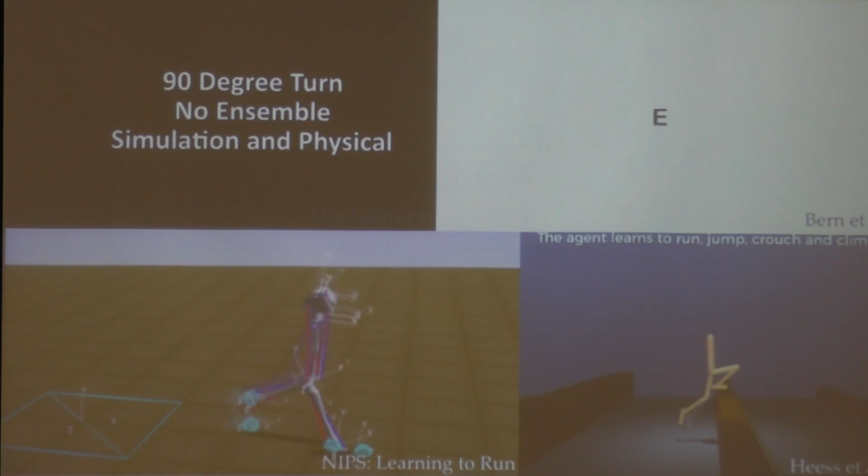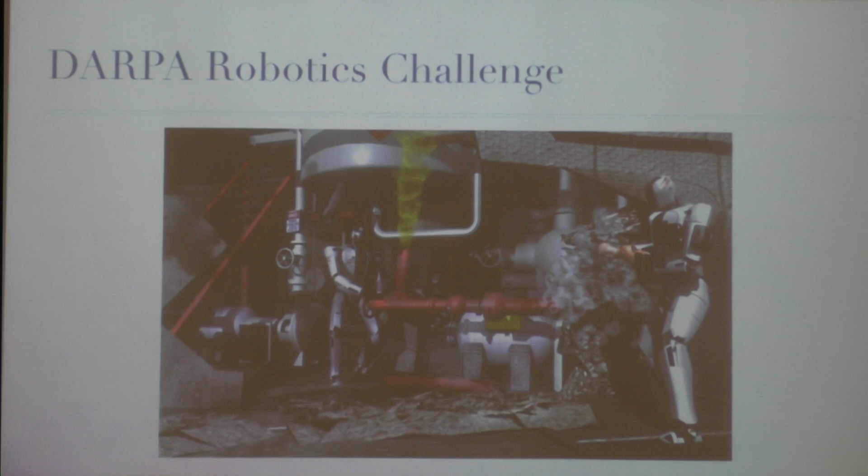So we start to see a lot of these emergent research areas at the intersection of computer animation, robotics, and artificial intelligence. And this change, I think, can be traced back to two distinctive events in robotics in the last 5 years. The first one I want to highlight is the DARPA Robotics Challenge. I think many of you probably participated in that. So the goal of the DRC is to really promote this promise of humanoids, right? We want humanoids to move like humans, such that they can adapt in the man-made world.

And the second event, which I think has a great impact, is the NSF National Robotics Initiative. So the whole concept of a co-robot, right? Putting robots together with humans in this collaborative setting. And that really requires research to rethink robotics from the perspective of humans. So these two top-down efforts from the national funding agencies actually have some unintentional impact in computer animation, because they basically highlight two, I would say, of the most important problems that we're trying to solve in computer animation: how to move like humans and how to interact with humans. So today I'm going to mostly talk about the second question, how to interact with humans, but I will also mention just one project about how to move like humans.

So how to move like humans. This is one of the most important research problems that computer animation researchers have been investigating for decades. Physically based character animation has evolved to a point where we can simulate complex human motions with great visual realism. So if you're just talking about simulation, we're actually quite confident that we can get a virtual agent to move like a human to some extent. But apparently this is not good enough. If we can only do things in simulation, however we make the virtual agent move like humans, it's not going to make any impact in robotics.

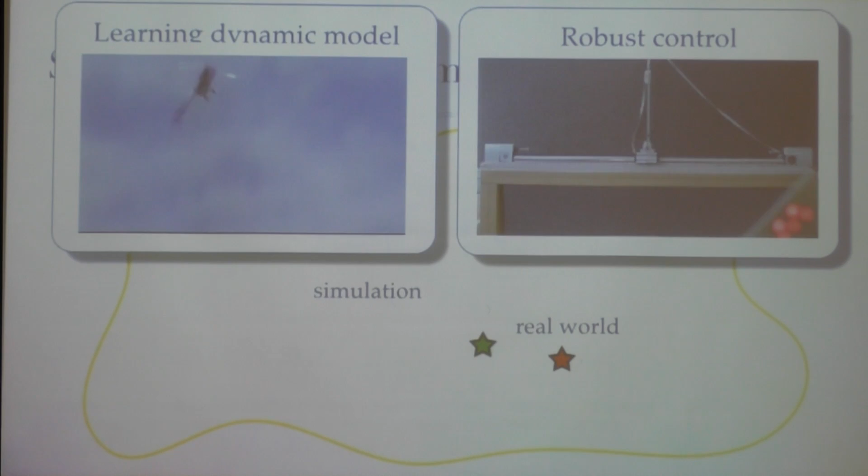Alternatively, we can try to train a dynamic model using the real world data by iterating between control policy training, data collection, and also dynamic model fitting. The drawback of this approach, however, is that sometimes it requires a large amount of real-world trials, which could be expensive, time-consuming, and dangerous to acquire.

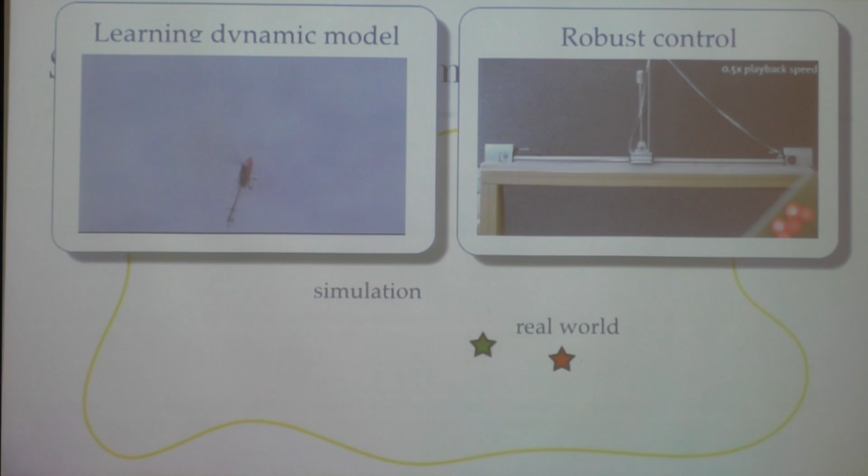So our approach to model the discrepancy between model parameters is slightly different. Assume that we can learn a control policy for every single point in this space, meaning that for every single dynamic model, we learn a control policy for that offline. Suppose further that during online execution, we have a very fast method that can tell us which dynamic model best fits the current sequence of observation.

Okay? So with these two hypothetical models working together, during online execution, all we need to do is to look at the recent history of our state and action pairs, and then select one dynamic model that best explains what we observed, and then execute the control policy corresponding to that dynamic model.

Of course, this is hypothetical. In reality, there's no way we can pre-learn a control policy for every single dynamic model in the world, but it might be possible to pre-learn a continuous parameterized space that covers a subset of states that we care about for this particular task. So with that idea, we designed an algorithm based on reinforcement learning.

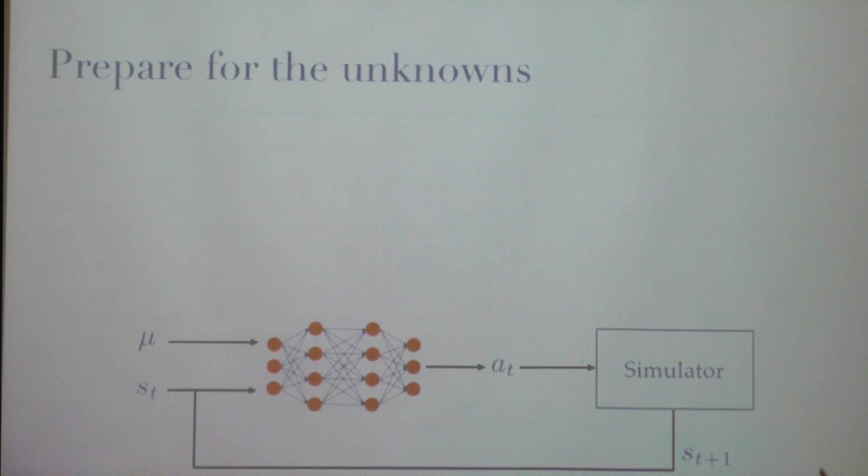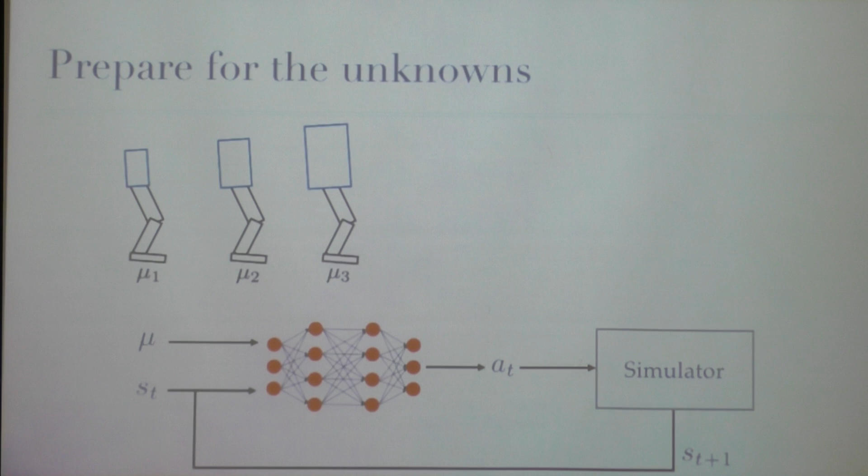Instead of just inputting the current state, we also take as input the model parameters. These model parameters could be, for example, the inertial property of the torsos of your robots. We call this universal policy because this policy can produce optimal actions for a parameterized space of model parameters. The problem here is that in order to use this universal policy, we need someone to provide the value of this mu, the model parameters, at every single time step.

To solve the problem, we train a separate neural network which predicts the model parameter mu based on the current state and a sequence of previous actions and states. Basically, a recent history of our observation. And we call this online system identification.

Okay? So during online execution, every single time step, we're going to query this online system identification: which dynamic model am I using right now? And together with the current state, this universal policy will produce the best action. One thing worth noting is that this online system identification can be trained using supervised learning, which is a lot easier than reinforcement learning in general.

So a lot of people ask this question: why don't you just train an end-to-end reinforcement learning problem? You could just have a recent history as your input, and then directly output the best action.

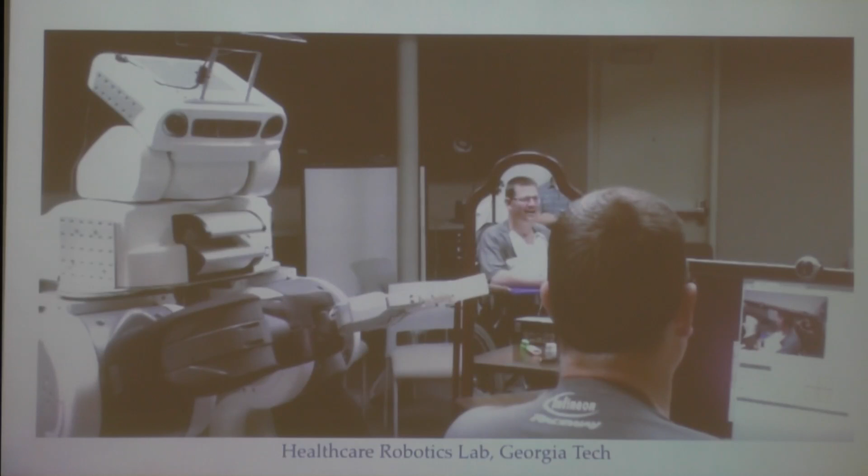All right, so that's all I want to say about the first topic. I have another project I was going to talk about, but then I realized it would take another hour to cover everything. So let's quickly move on to the second problem: how to interact with humans. One challenging scenario of co-robots involves physical interaction between the robots and the humans, like this video you're looking at. So this is really encouraging to computer animation, because now we believe the robot needs to understand and predict the behavior of humans in order to provide the best assistance to humans.

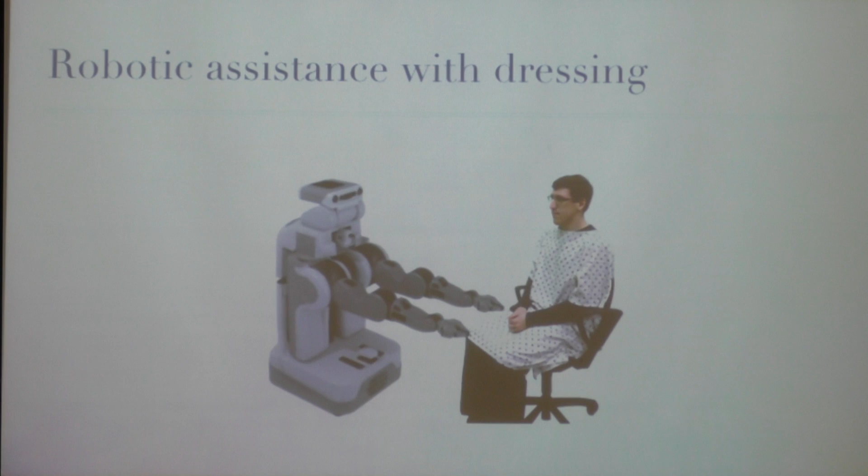So today I'm going to focus on a particular type of robot assistance. How do we teach a robot to put clothes on a human? Here are some facts about assistive dressing. Dressing is one of the ADLs, the activities of daily living, which are everyday tasks identified by the health care community as important for independent living. And dressing, among all the ADLs, is the one that's most frequently requested by older adults. And caregivers, whether at homes or in the hospital, spend an insane amount of time on this particular task, dressing.

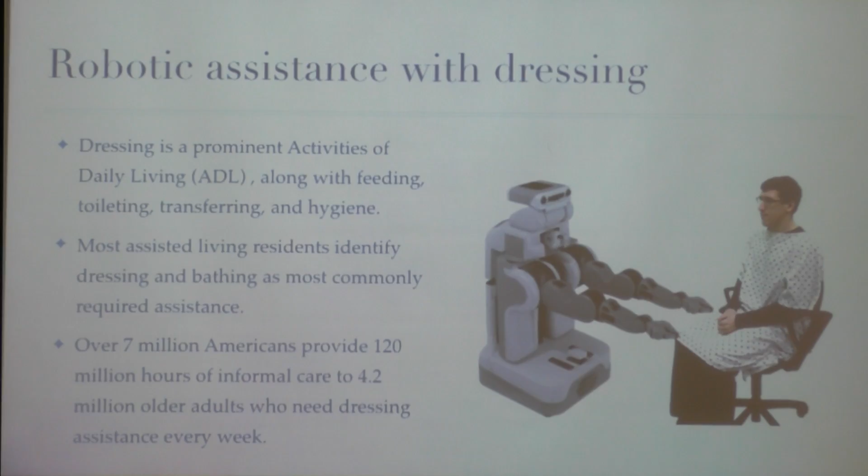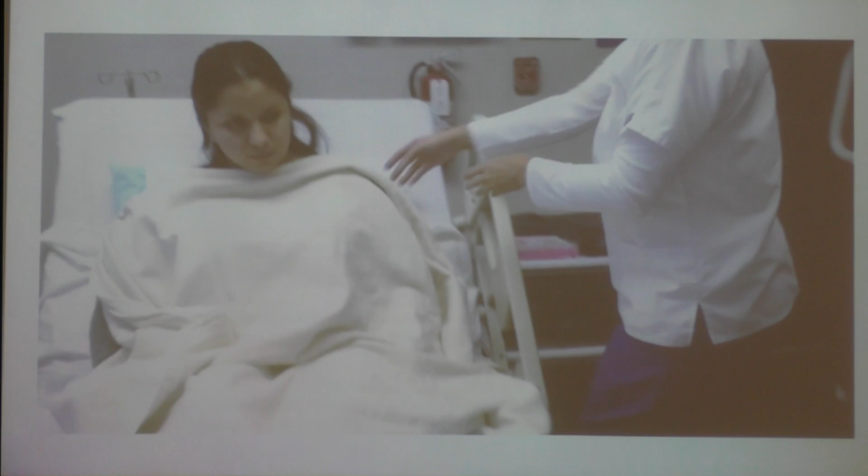So we believe that robotic assistance with dressing has the potential to augment the capability of older adults and improve the quality of life for not just care receivers but also caregivers. But dressing is actually a very difficult task, mainly because it's highly collaborative and interactive. So in order to succeed at the task, the human has to actively participate. Sorry.

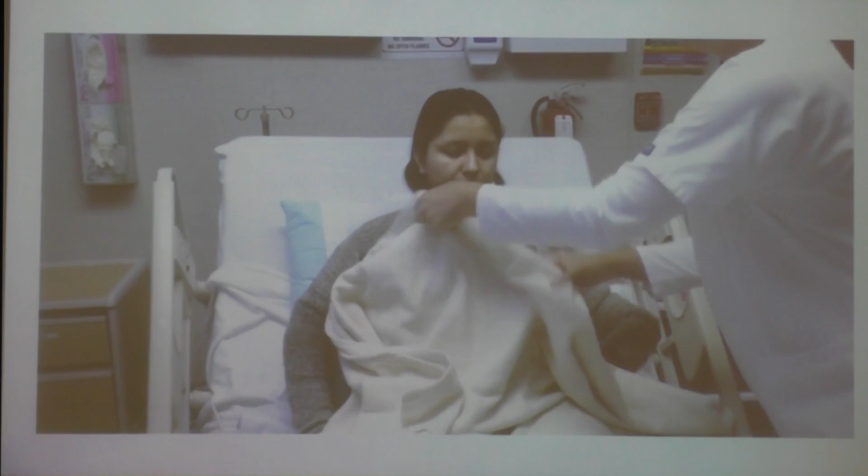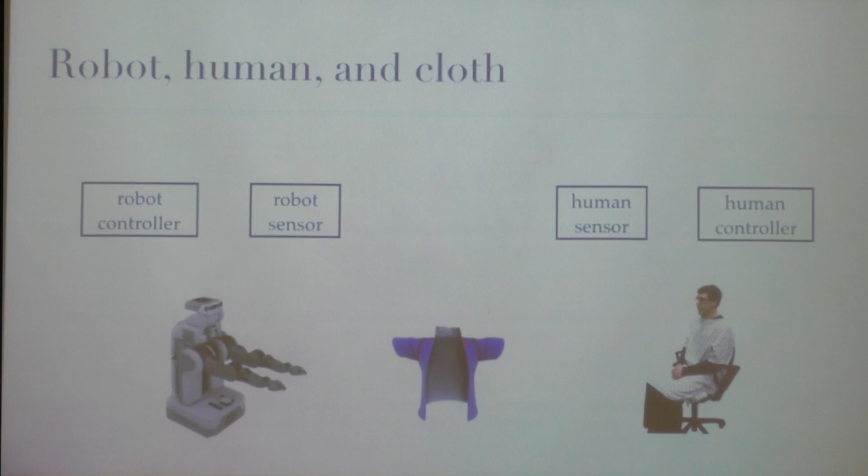So how do we tackle such a problem with so many moving parts? We know that we have a robot, we have a human, and we have a piece of garment in the middle. How do they actually relate to each other? We know that the robots and the humans have sensing capabilities and control capabilities. The sensors will produce some kind of observation, and the controller will take the observation and produce an action. So that part we know.

We also know that sensors should have the ability to partially sense their own states and maybe each other's states, as well as the state of the environment, in this case the garment. And in addition, the state of the robot and the state of the human can also affect the state of the cloth through dynamics, through physics. So yeah, that's what their relationship looks like.

And very quickly, we decided that we can't really learn this human policy from the real world because all those policy learning algorithms demand an insane amount of rollouts. And imagine those rollouts all involve physical interaction between the robots and humans. We all know that robots are not really good at the beginning. Especially at the beginning, it's pretty much just choosing random actions and applying them to humans. So we're going to take a safer approach, which is what we did in computer animation. We're going to replace that with virtual humans in physics simulation.

So the traditional approach to human modeling is to design a procedure based on maybe some motion capture data or some assumptions. It works pretty well in computer animation for well-structured motion, like locomotion, for example. But designing such a procedure for a loosely defined task, such as being dressed, is likely to be very biased, at least biased towards whatever motion capture data you use.

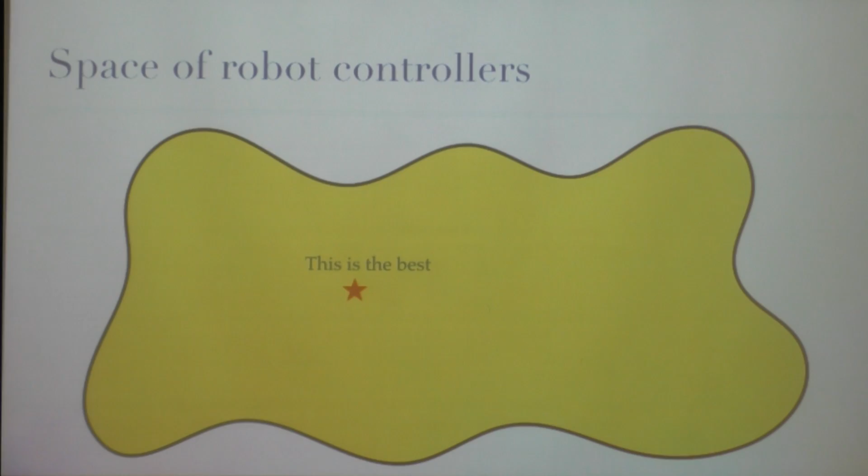So to see this more clearly, the same space, but now it means the space of all robot controllers. So suppose this is all the controls that PR2 can achieve. Given a particular virtual human model, we can find the best robot controller that serves this virtual human. So for example, if this virtual human is just a static mannequin, then we can find the best robot control for a static mannequin.

And if now we have another virtual human, which is based on some motion capture data, we can also find a best controller for that virtual human. And it's likely to be different, right, those robot controllers. So this means, since we can't possibly model every single human behavior in this space, whatever we do, this robot controller is going to be biased.

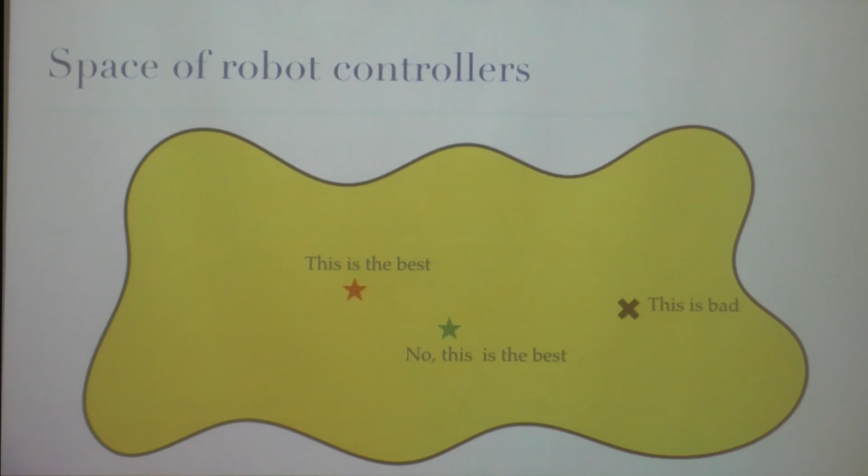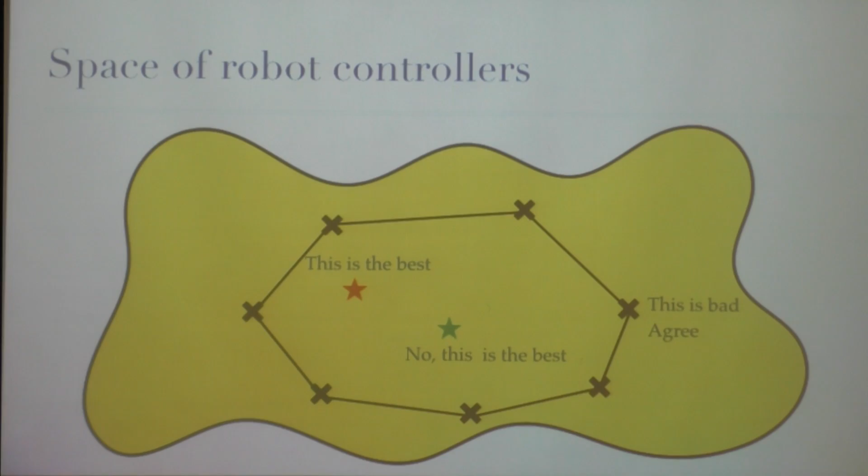But one interesting observation is that even though those virtual humans disagree on what the best assistance a robot can provide, when the robot provides a very bad assistance, they are usually in agreement. So this means that instead of modeling what a human typically would do, we should be modeling what a human cannot do, right? So basically our approach is to model the range of human capability in the context of dressing.

And this kind of modeling is less biased towards a particular set of data, and it's also more easy to identify, to quantify mathematically. So I'll show you a few motion sequences that we did in computer graphics.

Sorry, back. Can I go back?

Oh, sorry. I don't know why. Does it play? No. Oh, I see. It plays here, but not on my screen.

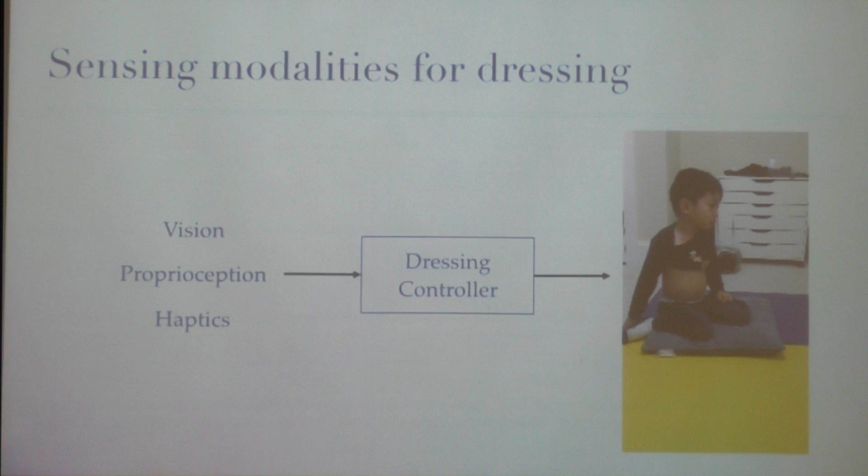Yeah, he's done. It's not like I cut off, he's done.

The first problem that we're encountering is how do we encode all this variety of modalities into our input space? And the second problem here clearly is how do we design the reward function such that we can constantly get enough learning signals throughout the learning process.

So one possible way is to throw everything you can sense into the input space, right? All the raw data that you can get from your sensors, like proprioception could be the joint position, joint velocity. The vision could be just the pixels that you see from your eyes, and haptic information could be the pressure applied on the surface of your body. This could also be encoded as another form of images, and the output will be directly joint torques.

So while this end-to-end learning scheme is getting more and more popular in the deep reinforcement learning community, we don't think end-to-end can be applied to the dressing problem for the following reasons. The first is that haptics is really hard to figure out. Basically, we ask the agent to utilize haptic information for two opposing tasks, to apply force and to avoid force.

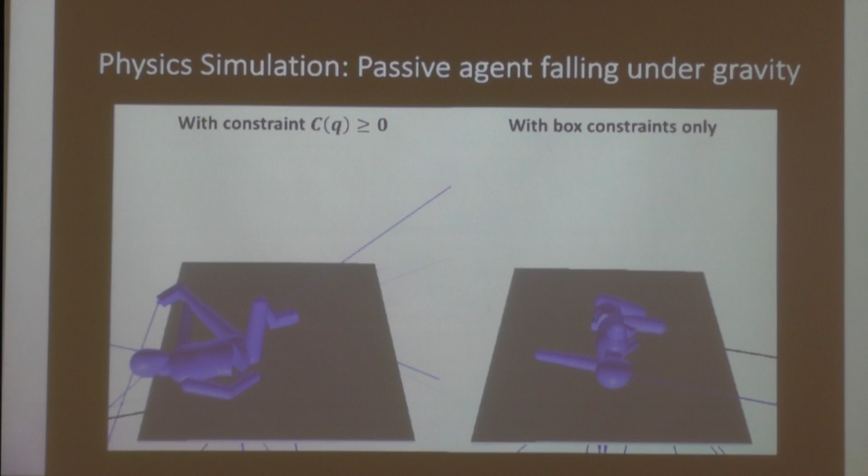And the one on the right only uses the traditional box constraints, and the one on the left uses our data-driven constraints. And without any control, internal control, you can see that joint limits alone can already create some lifelike behaviors. This is no control, it's just joint limits itself.

And another example here, this is in the situation where there's no gravity, like outer space. You have these virtual astronauts where they are pulled from their left arm at the beginning of the simulation. And this is with a box constraint. And this is a constraint people usually use. And we're not really trying to make it look bad. We're actually very carefully selecting the upper bound and lower bound for each joint. And this one is with the data-driven constraints.

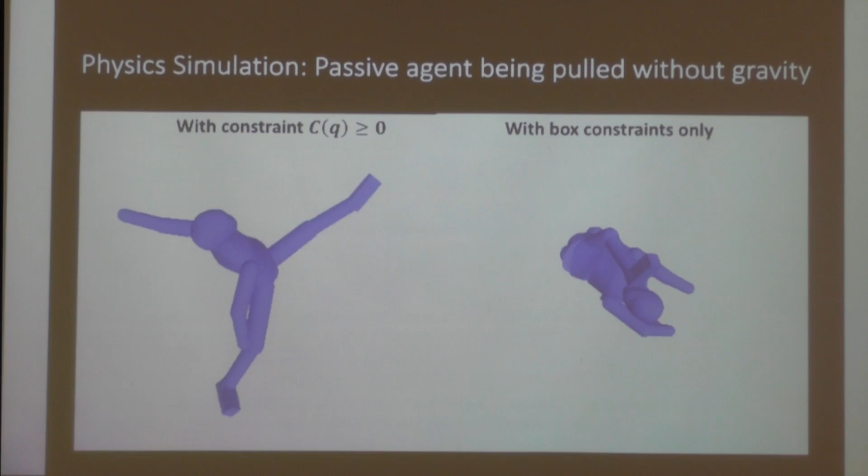So besides dynamic applications, we can also use these joint limits for inverse kinematics, right? When we solve inverse kinematics, we can guarantee to get a pose that's humanly possible. So in this case, we're trying to get the character to reach an unreachable point in the back. And you can see that with box constraints, you can do that, but with our data-driven constraint, you will just stop at the right place. That's where you hit the boundary of the joint limits.

And we also observed that with the data-driven joint limits, we can also mitigate the problem of self-collision, right? This probably happens a lot when you are dealing with modeling humans. If you're trying to do IK to get to that point, well, of course, the best way to get there is just go through your torso. But with the data-driven joint limits, you actually avoid that penetration without doing any collision detection. This just comes for free.

And that's not surprising, right? Because we learned this from a database. And that database is from real humans. And real humans don't self-penetrate. So then of course we just learned that as part of the invalid region in the space.

So I talked a lot about how to model humans, and now let's get back to robots. So how do we design a robot to provide dressing assistance? The first problem we want to address is the sensing capability, robot sensors. So vision is limited due to occlusion of clothes on the human body. And there's not much we can do about that, right? Because occluding the human body using clothes is the nature of dressing. So it's not like we can come up with a more clever algorithm to enhance computer vision.

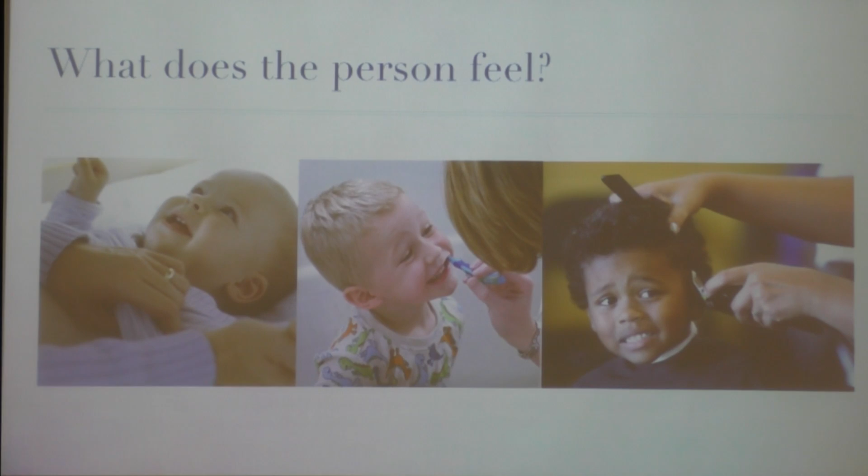However, there's a lot we can do to enhance the haptic capability of the robots. So essentially, we want to teach the robot what a person feels when it applies an action on the human body. Over years and years of experience and learning, human caregivers have a pretty good expectation of how the person might feel when he or she applies physical force on the human body. But robots don't have this kind of common sense unless we explicitly teach the robot how to infer this human haptic perception.

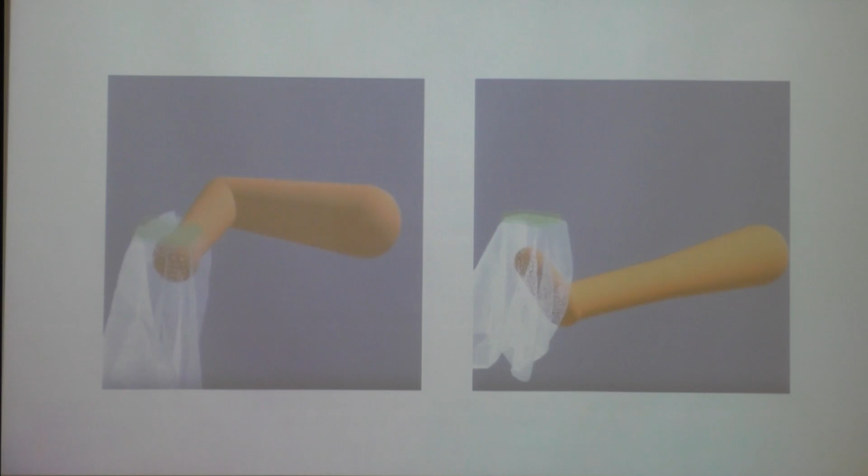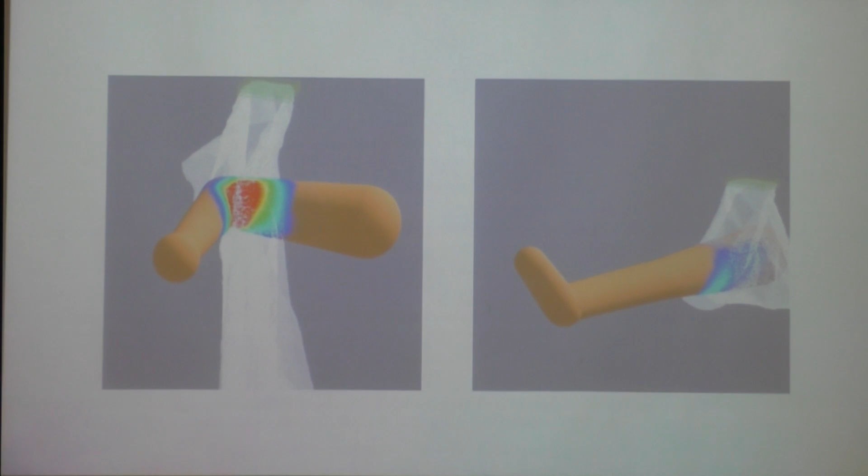So you might think clothes are harmless. What kind of damage can clothes do to you? But actually, they can apply a very high amount of force and cause discomfort on the human body if you are pulling really tight. So we want to be able to capture those pressures applied on the human body using a tactile image. Because this image is really informative, it can tell us which part of the human body is covered, and it can also tell us whether the cloth is caught and by which part of the body.

So one way to get this kind of information is to directly measure from the real world using wearable sensors. But this is kind of impractical, right? Because imagine, in order to get dressing assistance from the robot, you first have to put this wearable sensor on yourself. It's just silly. So wearable sensors are not something that we can do easily. Instead, we want to be able to infer this haptic information from the limited sensors that the robot has.

So to be more specific, we want to create an estimator whose input is the force and torque information measured at the end effectors, and the output will be the haptic perception represented in the form of tactile images. Okay, so that's the input and output we want to learn. And we train our model on data generated entirely in physics-based simulation. This allows us to quickly generate thousands of training data without worrying about hurting the humans in the scene.

And with that, we can create these training pairs where the input is the trajectory of the forces and torques measured at the end effectors, and the output would be the haptic information as images. And with this, again, because everything is generated in simulation, we can generate as many as we want and train an LSTM to do this kind of haptic estimation.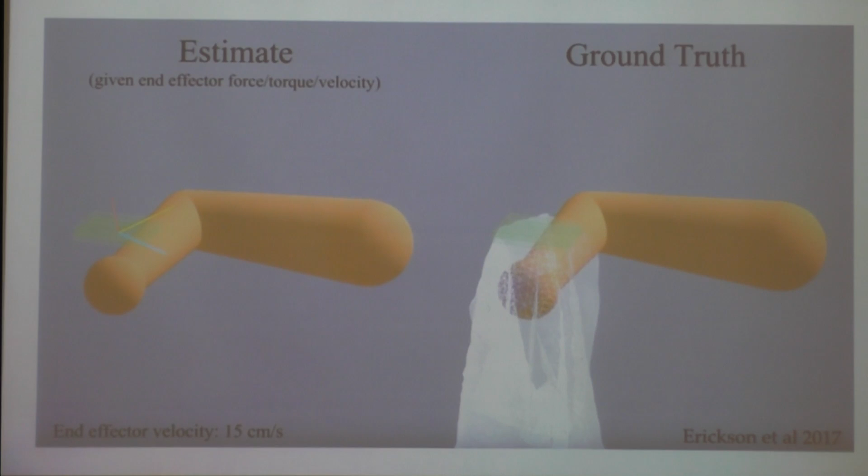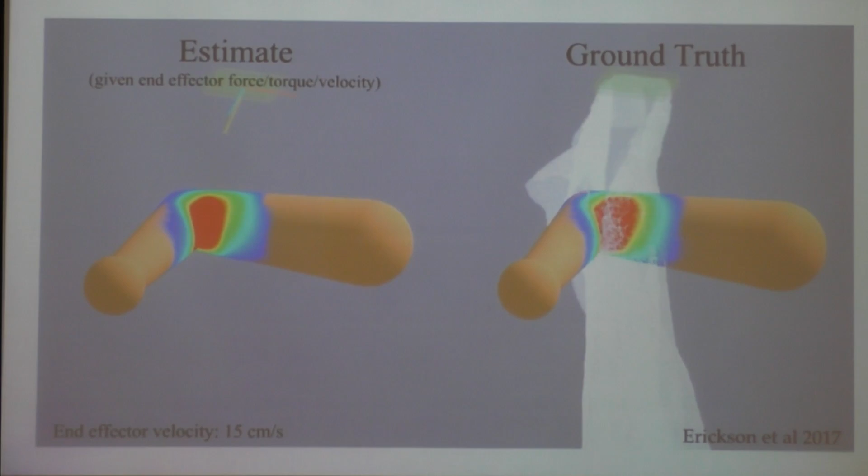To test our haptic estimator, we command our robots to follow arbitrary trajectories. That's where this green box is. And you can see on the left is the predicted haptic information from our estimator, and on the right is the ground truth that's actually being simulated through the physics simulator.

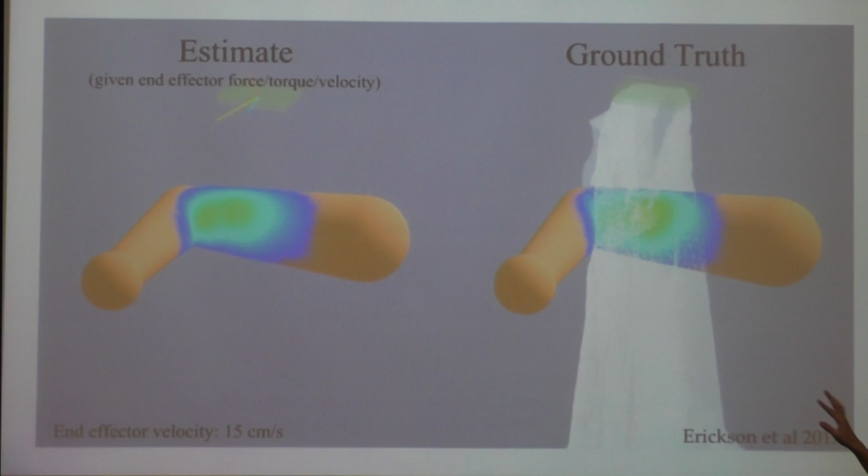So basically, all the robot knows is the three vectors that are shown on the green box. And from there, the robot has to hallucinate what a person might feel on their body.

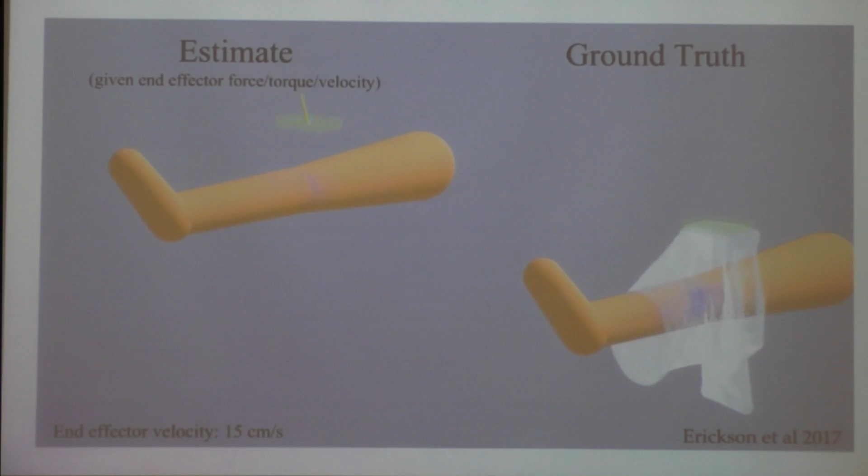Okay, so how do we take advantage of this inferred haptic information in decision making? One straightforward way is to evaluate the candidate action using this haptic estimator. But successful dressing also requires a policy to consider future impact caused by this candidate action instead of just the immediate next stage. So one approach is to combine this haptic estimation with MPC, with model predictive control.

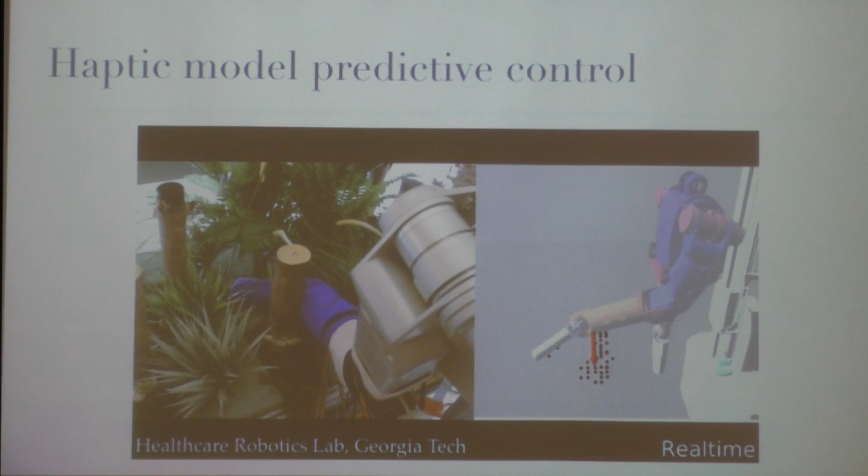This work is done by my colleague Charlie Kemp at Georgia Tech. They use a model-based approach and then combine it with the haptics to do this MPC-style control. Unfortunately, we can't really use a model-based approach because simulating the dynamics for dressing in real time is just not feasible. So instead, we want to learn an MPC controller using the simulated haptic data in a model-free fashion.

Again, we are going to reuse this simulated haptic data we generated for learning the haptic estimators. But this time, we're going to code the information slightly differently. The input of our training data will be the state history, the candidate action, and the predicted measurement. And with that, we can create as much data as we need to train this LSTM to predict the future states.

And finally, we're going to combine this predictor with the estimator so that now the predictor will take the history of the states, take one candidate action, and give you a sequence of predicted states, and that will be fed into this estimator, which will give you the final human haptic perception. And then we can define an objective function which prioritizes the action that minimizes the future haptic perception.

Okay? So one good thing about this method is that we decouple the objective function from the model training. So later on, if you need a different objective function for different tasks, you can do so without retraining our models.

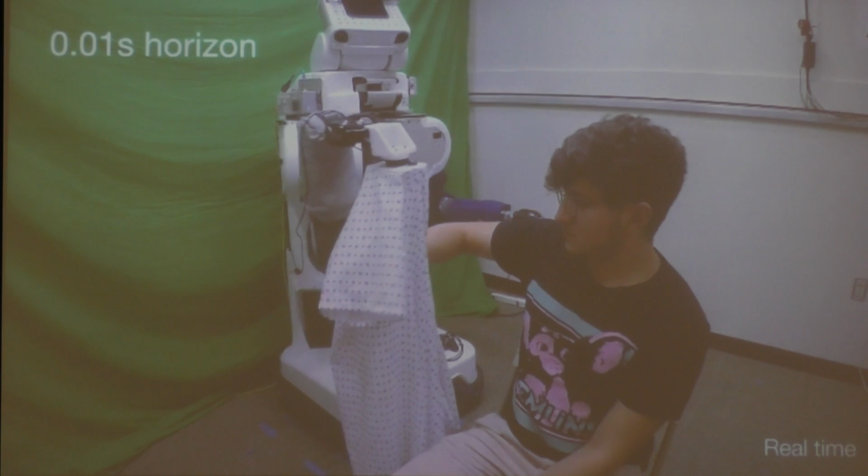And we further compare dressing results for various time horizons in MPC. And as we predicted, when you have a very short horizon like 0.01, the robot is not able to negotiate around the fist. And as we increase the time horizon, the success rate also increases.

So what's next? We're actually at the beginning of the third year of this 4-year grant, and we have touched each of those boxes, but we haven't quite pulled everything together into one system yet. So that's one thing we're going to do. Another thing we want to be able to do is to test this on more unstructured scenarios. What can possibly go wrong if a robot tries to dress a 4-year-old boy?

Make sure you have that run stop, Karen. Please watch Connor carefully. And Connor, if you don't like anything, just let us know. No, yeah, that's the one. No, don't. You're going to confuse the robot.

Yep. So we still have a long way to go.